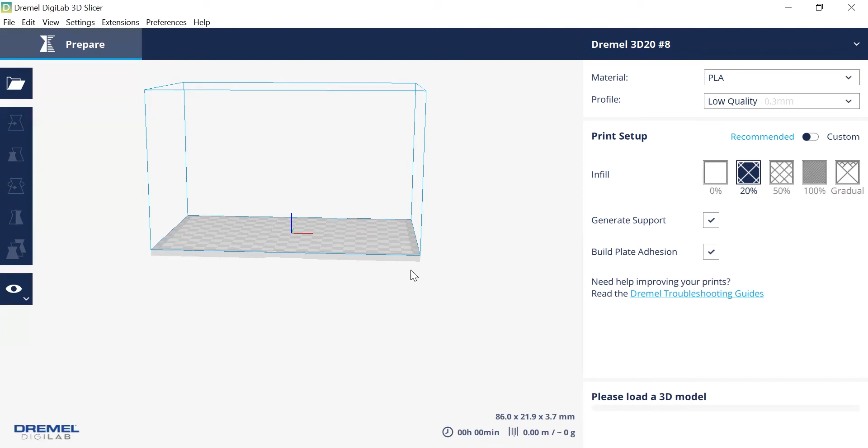Now we're going to load our file into the software. To do that, we click Open File, on the left-hand side here, and select my file, then hit Open. Now my file is showing up on the floor of the 3D printer, which is great. We want to make sure the file is nice and flat on the printer so it's not floating.

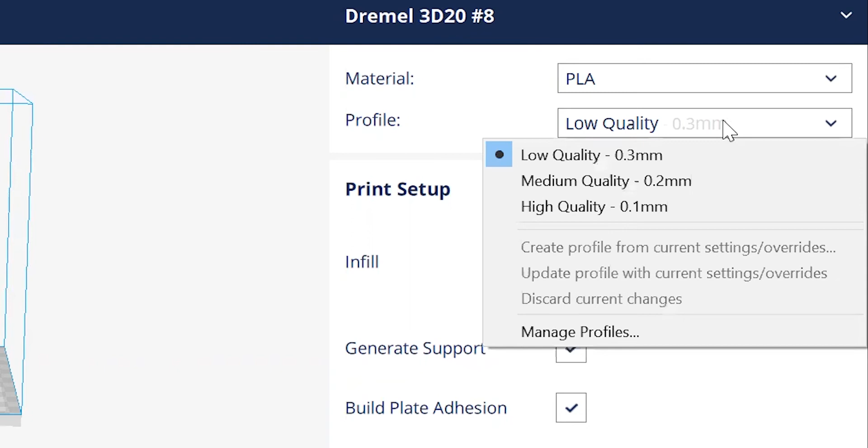On the right-hand side we're also going to set up our design for what we want it to look like in physical form. We're going to be printing using PLA plastic, so that's the material. For profile, this refers to the smoothness of the design. We're going to make sure this is on medium or high quality, depending.

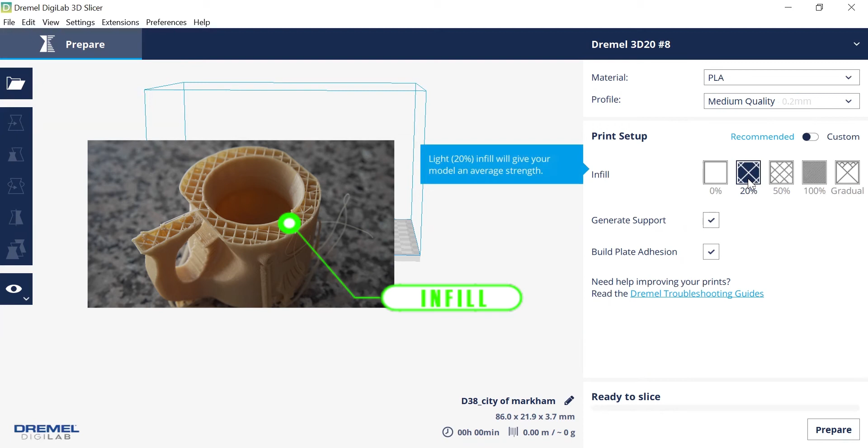The smaller this number, usually the longer it's going to take to 3D print, so I'm going to click 0.2 to get a midway point. Infill refers to the internal structure of our 3D model. 20% infill means it's going to be 20% solid inside the design, so I'll click that. But the bigger the number here, the longer it'll take.

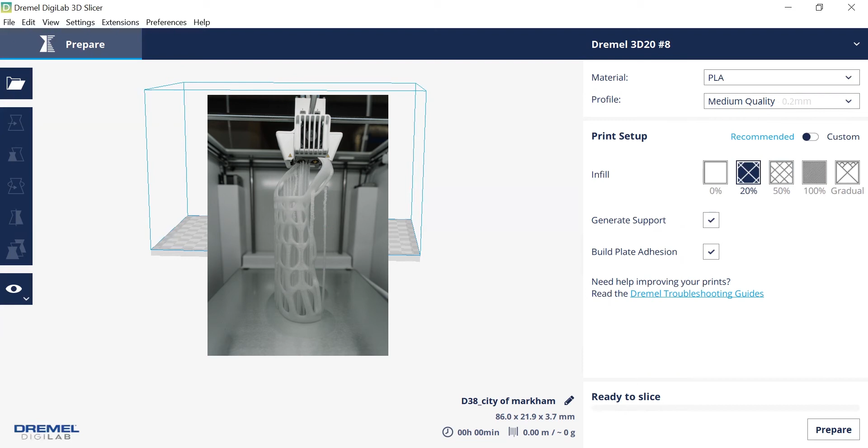Generate support refers to whether your design has anything with overhang angles or parts that will be trickier to 3D print. My specific design is basically a keychain that's relatively flat, so I'm going to make sure I have that box unchecked.

Build plate adhesion, I usually keep this on. It creates a little bit of plastic around your 3D design that you cut off later. It's very helpful for making sure your design stays in place while it's 3D printing, just gives it an extra layer of stationary support. So I'm going to make sure this is checked off as well.

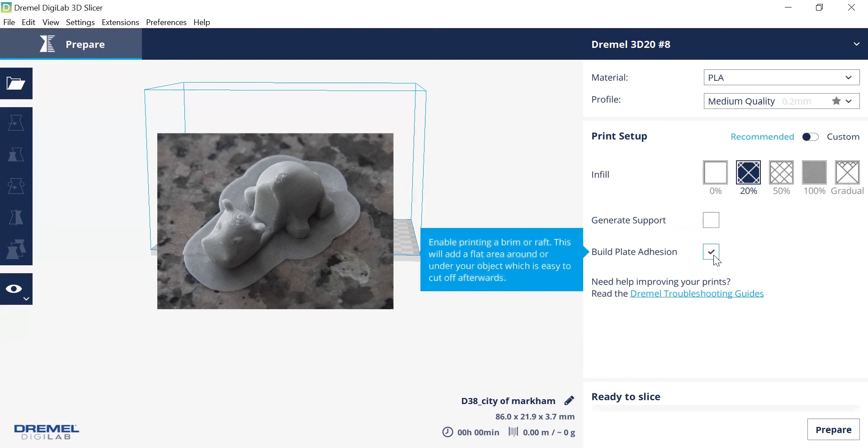Once I have all of this enabled, you can hit Prepare and your design will be ready to save to an SD card, which can then be inserted into the 3D printer.

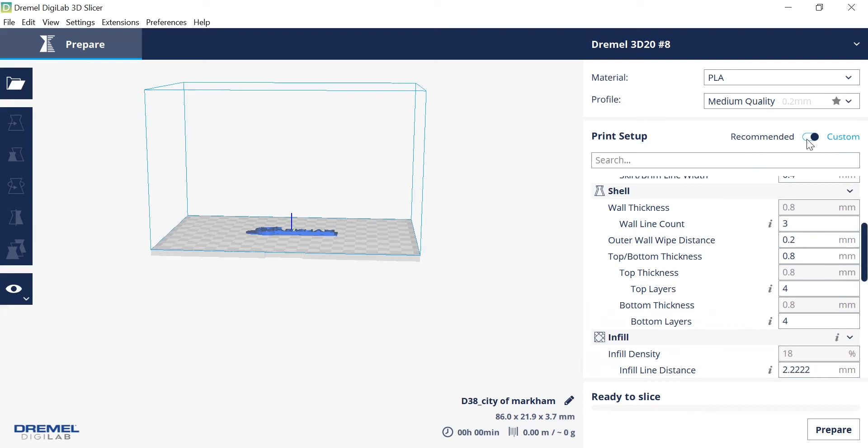Now, there are custom settings you can adjust to get more detail with regards to designs. You can use this in very rare cases - I don't recommend using it too much, as it creates too much time for troubleshooting. But for beginners and starter projects, the recommended setting is the best one to use.

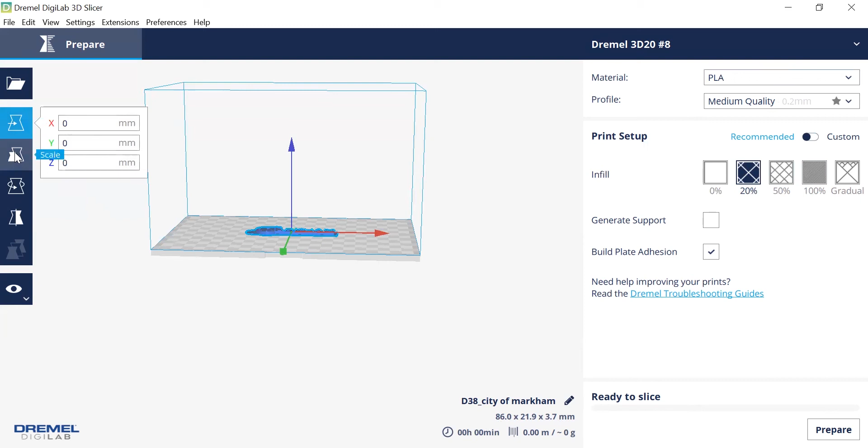You'll notice my design is showing up here at the bottom right-hand corner, telling me the length, width, and height of my 3D design. If I select my design, I can also adjust properties in terms of scale, so I can make it bigger or smaller if I needed to. You can rotate the design and you can mirror the design.

Scaling the design makes it bigger or smaller in length, width, and height, and you can adjust those sizes proportionally as well. The bigger the design, the longer it'll take. If you need a specific design or design specifications, make sure you don't adjust scaling at all. But if you want to make it bigger or smaller just to test it out, that's an option too.

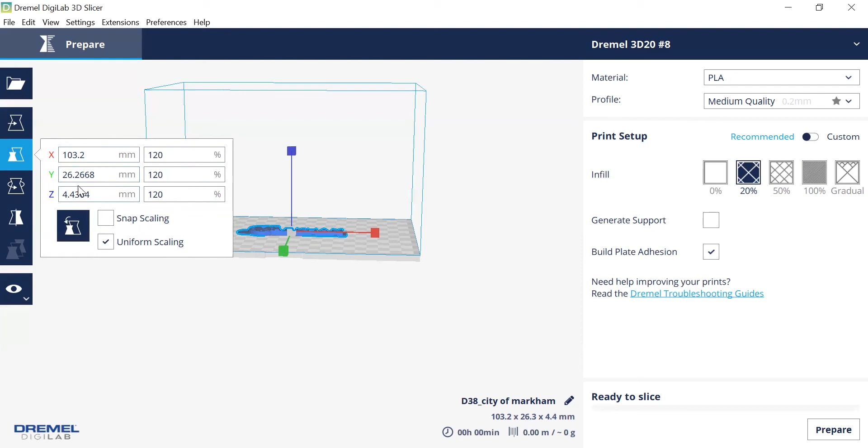So if I want to make this bigger, I can, and it's adjusted for 20% larger in terms of length, width, and height, and my dimensions in millimeters have adjusted for that on the right-hand side. I'm going to go back to 100 and keep it at its intended design size. And if I hit Prepare...

It's going to tell me that my design is going to take 20 minutes, and all I have to do is click Save to File. If you have an SD card reader and plug in your SD card, it'll save directly to the SD card as well, so that's very useful. All you have to do is take that file and SD card to the library, and you're good to go.